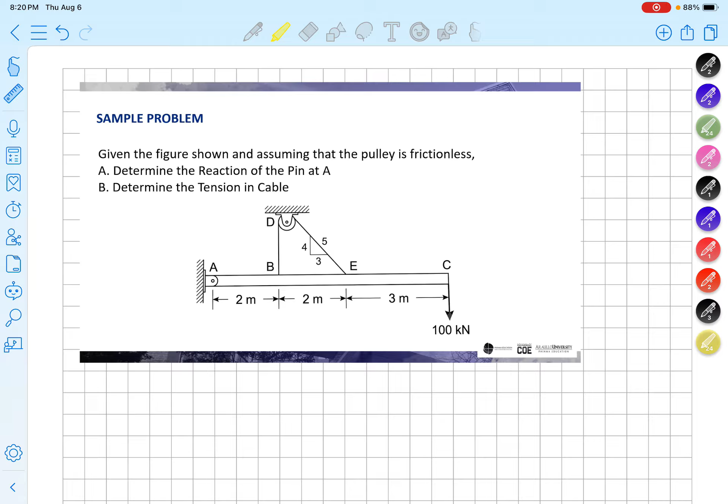Okay, let's go. So this is the third example of our non-concurrent force system equilibrium.

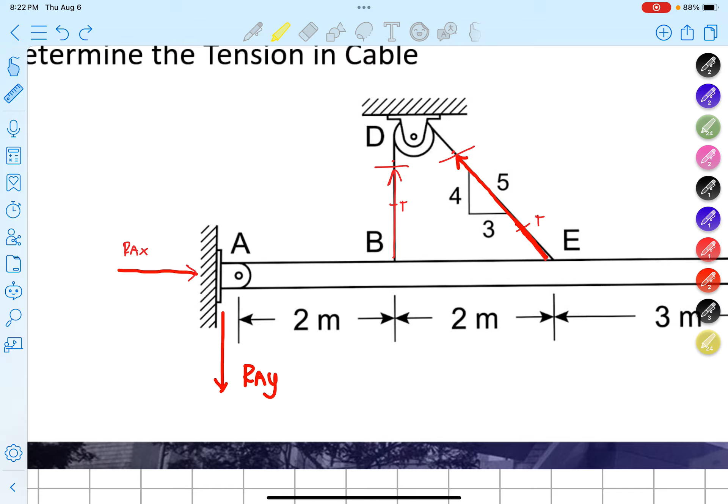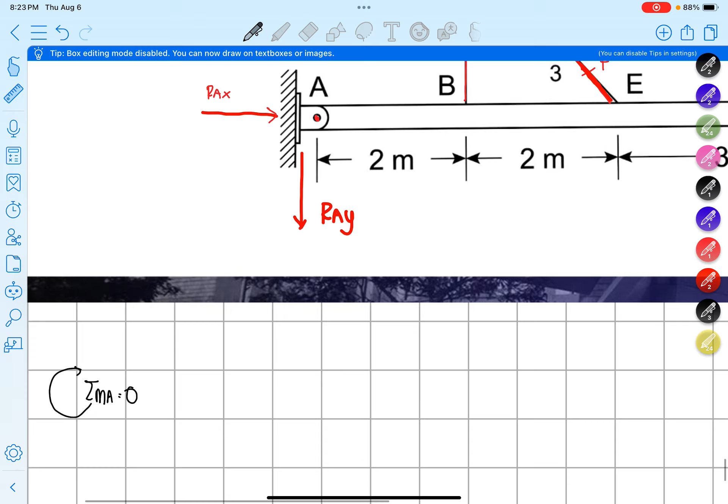Let's take the summation of moment at A equal to 0, considering clockwise positive. Okay, so basically 0 is equal to, what do we consider?

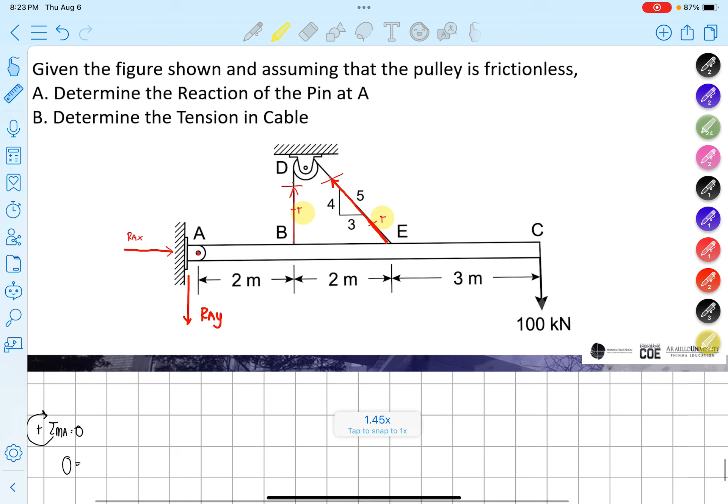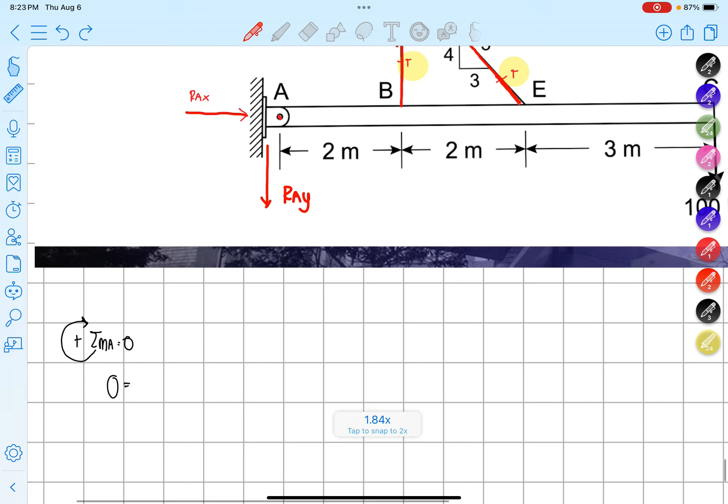We have this one and this one. So we have, based on T, it will rotate counterclockwise from A. I hope guys, at this point, we can identify it quickly. It rotates counterclockwise from A, so that means it's negative. Negative T multiplied by the perpendicular distance of 2 meters.

So this is 2. Now we have another T here.

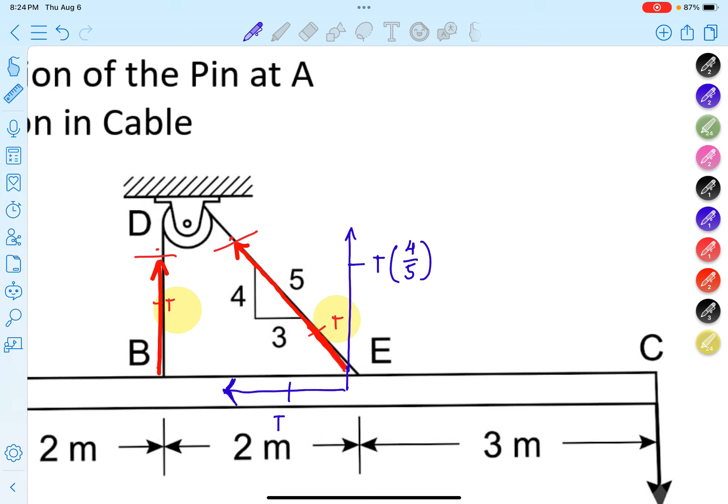But that T will have vertical and horizontal components, right? In this case, the vertical component is T, 4/5. This other one is T, 3/5. Okay, but in this case, when we take the moment, will this horizontal component of T have a moment? No. So remove that.

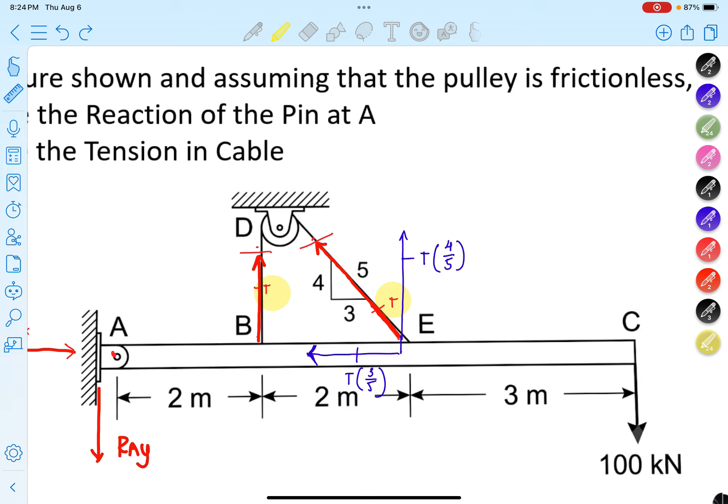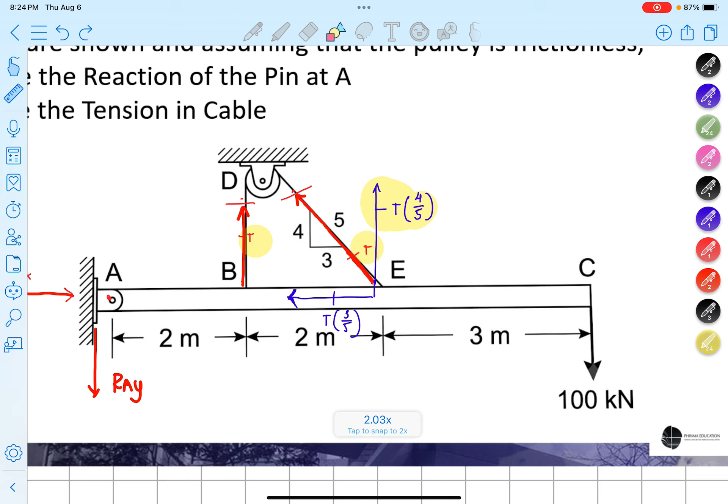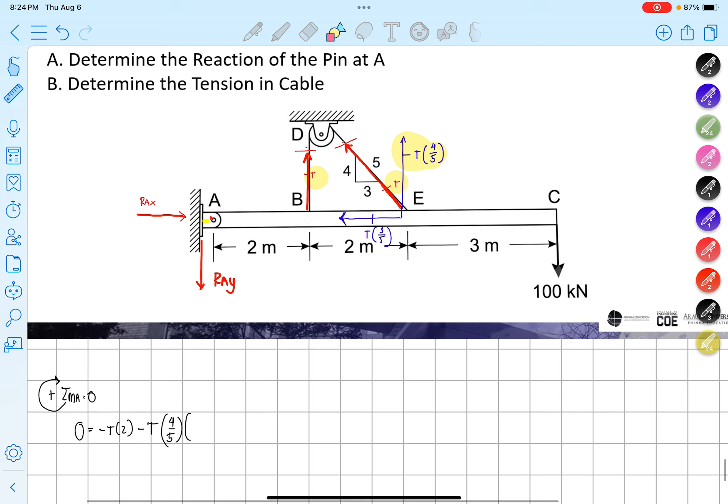Let's consider this one instead. Okay, but the perpendicular distance from point A is simply from here to there, so 2 plus 2. So that means this is T, and by the way, its rotation is also counterclockwise. So T multiplied by 4/5, multiplied by the perpendicular distance from point A, which is up to there, 4 meters.

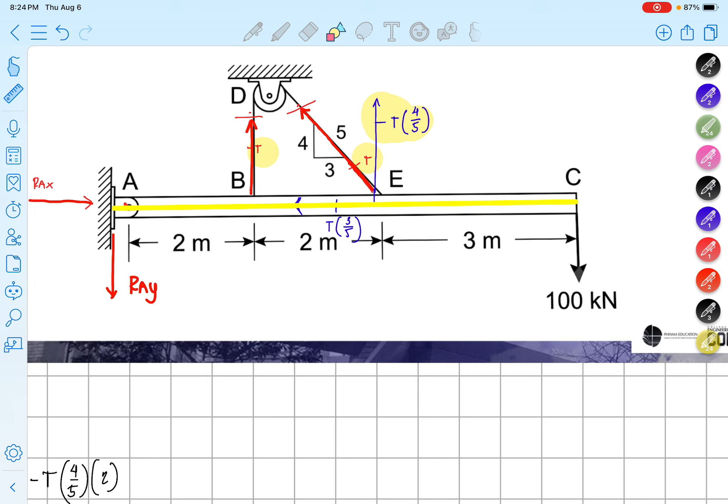So this is 2. Then, the remaining part, of course we can't get the value if we don't consider this portion. So this is 100 kN. Its perpendicular distance is 2, 4, and then 7.

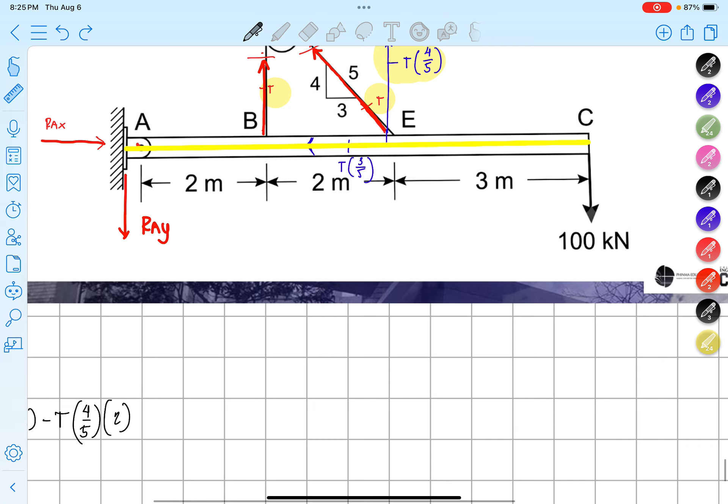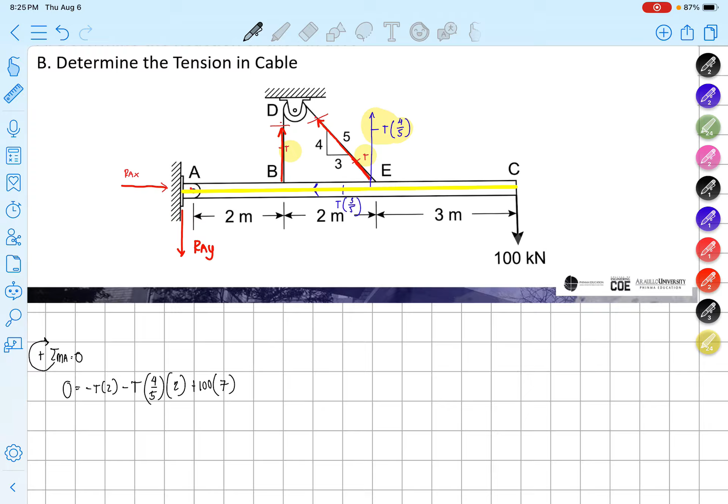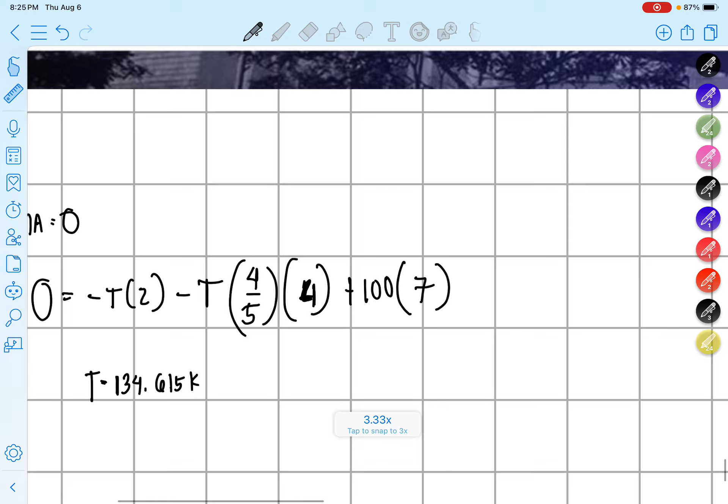Taking that, we have T is equal to 134.615 kilonewtons. Okay guys, now we're good.

So we're done with moment. Actually, we can safely say that the summation of forces vertical is equal to 0, considering upward positive.

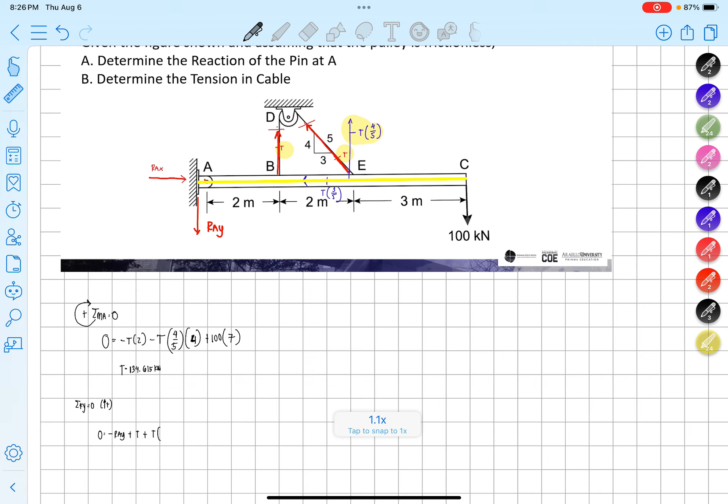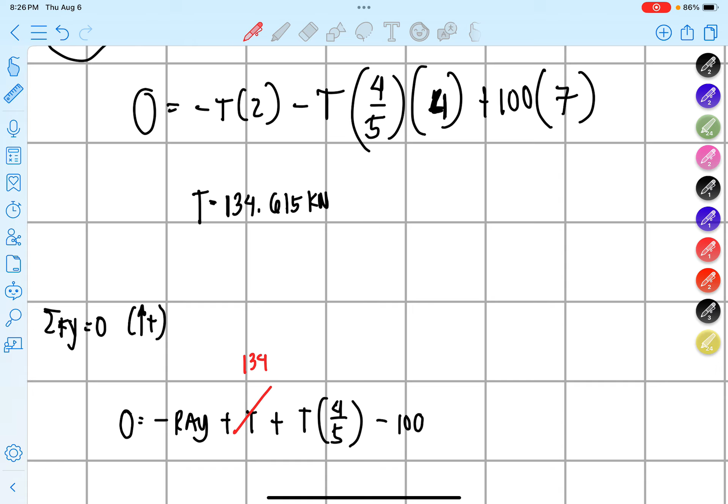So 0 is equal to negative RAY plus T plus another T with a vertical component, 4 over 5, minus 100 going down. So our T here is basically 134.615, and this is another 134.615.

We can get RAY equal to, RAY plus 134.615 plus 134.615 times 4 over 5, minus 100. So we get RAY. This is equal to 142.307. Okay, for RAY, we have 142.307 kilonewtons.

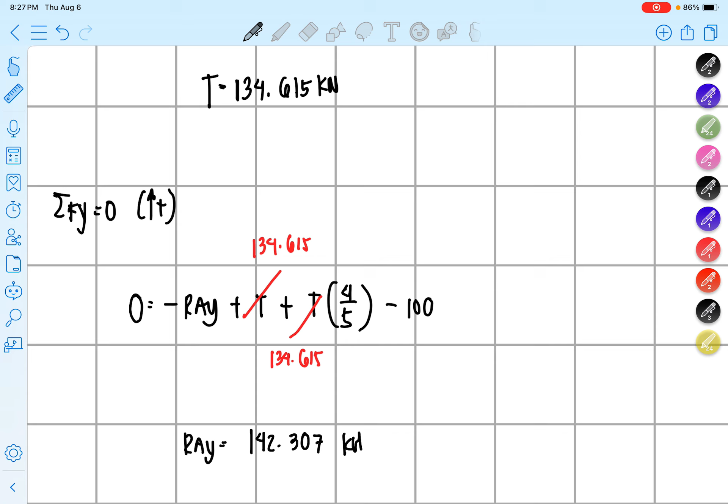Okay, so this is now RAY. This is T, this is RAY.

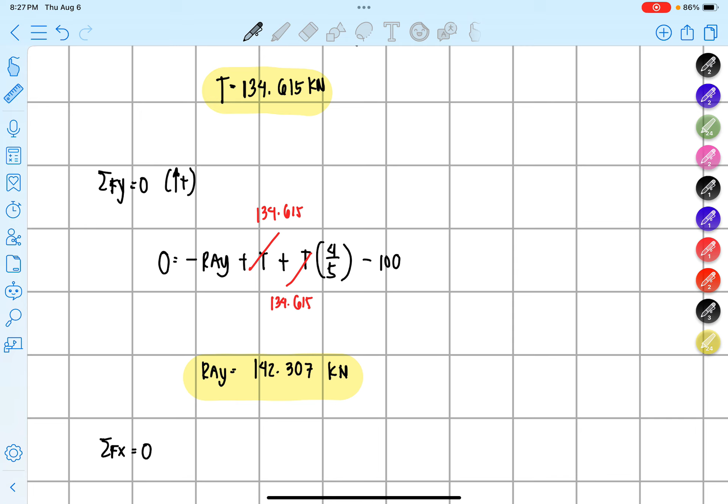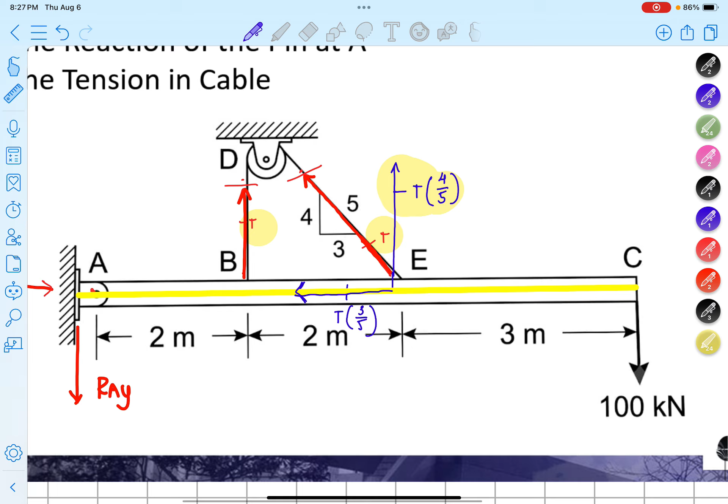Now for the summation of forces along X equal to 0: 0 is equal to, our RAX going right, minus the horizontal component of this one going left. So that means minus T, our slope there, if we use slope, is 3 over 5, since it's the X component, X over R.

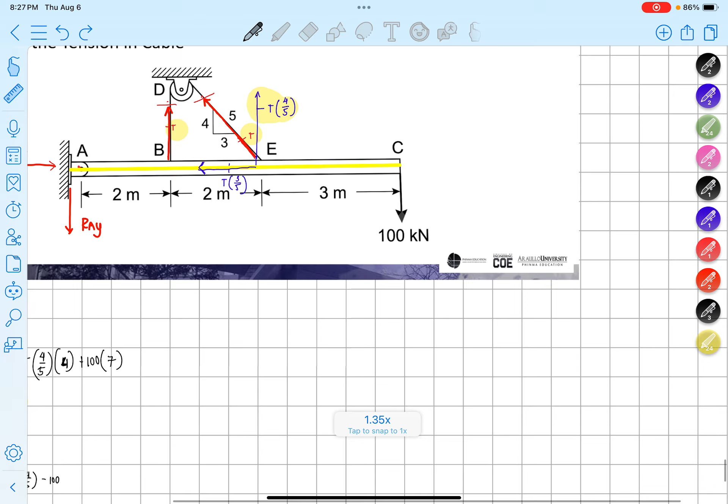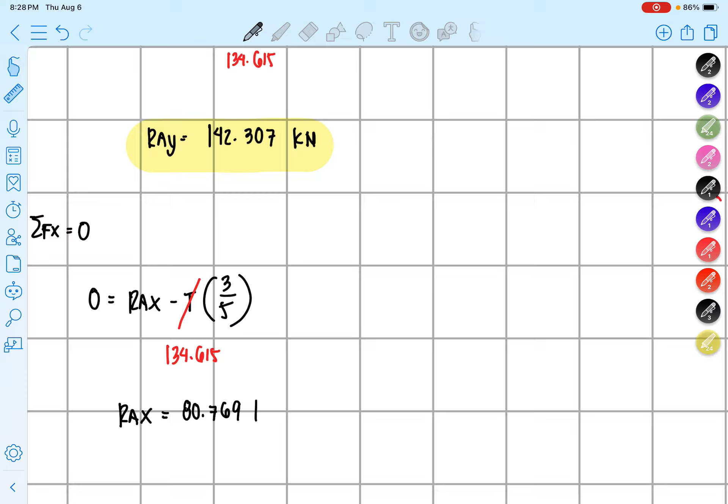And our T here, to repeat, this is 134.615. For RAX, this is equal to RAX is equal to 80.772, 80.769 kilonewtons. So this is equal to that.

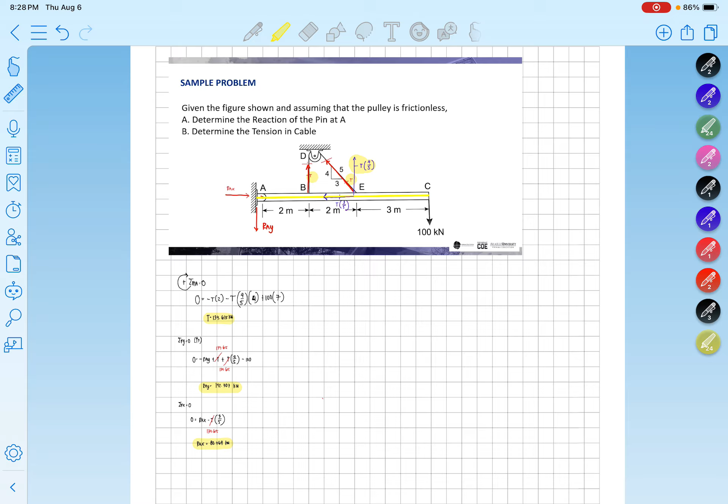Okay, so there, that's our answer for this problem. But actually, wait.

If what we're getting here is the resultant R, this is simply equal to the square root of 142.307 squared plus 80.769 squared. So this is equal to 163.63.

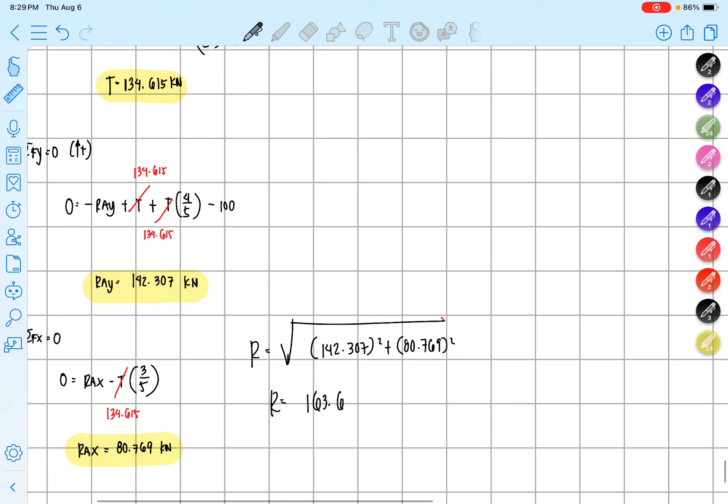There, so that's sample problem number 3.